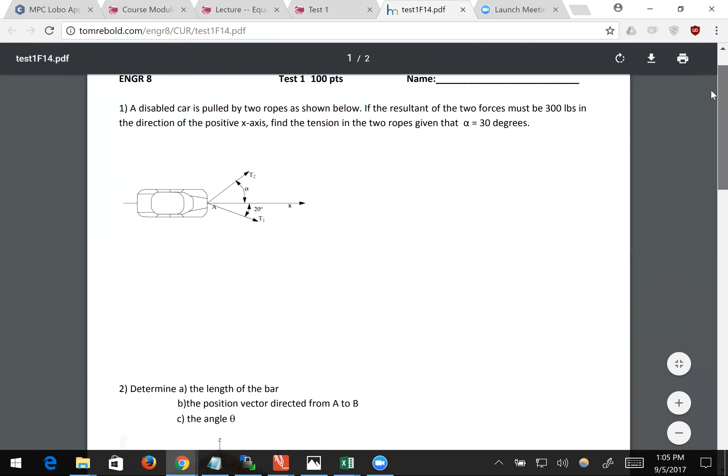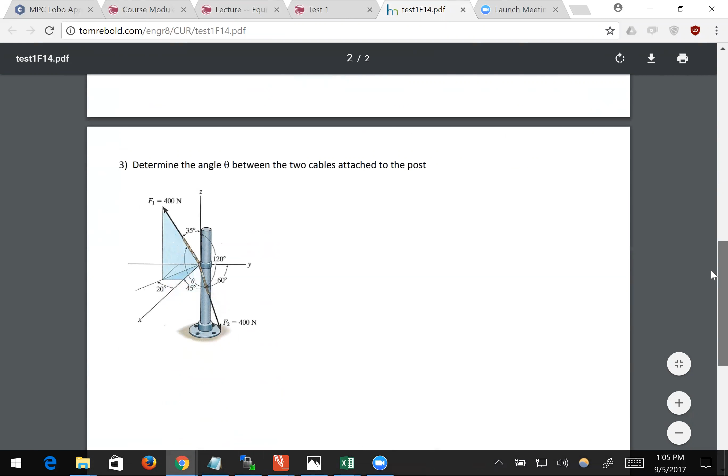Just in case you're curious, this is what the practice test looks like. It has a few problems like that. This is kind of assignment 2 stuff. This is position vectors. This is dot product, right? So yeah, that's what the test looks like. And that's the practice test.

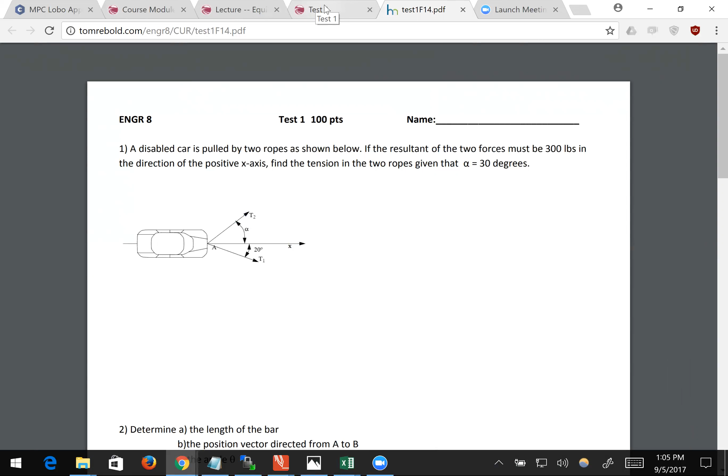Any questions before we get started on the homework? Can't go too far into it. Any short questions, because I want to make sure I get the lecture in today. Any short questions on the homework?

I'm going to have to close this. It's kind of too noisy. Can't hear anything.

And let me get this thing going. Oops, I can't do that. I want to do, this thing is really kind of annoying. What do I do with this giant menu bar? Put it down here maybe. There's just never any good place for something like that.

Maybe I can make it shrink. That's better.

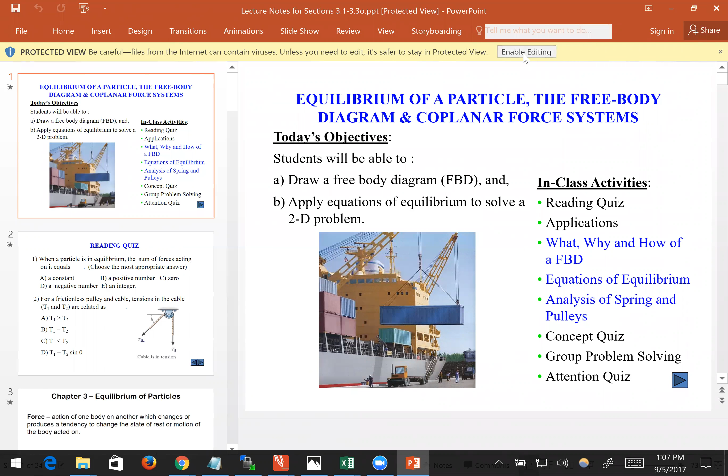So we're going to have basically 2 lectures this week. Problem session on assignment 3 on Thursday. You'll get the practice test to look at over the weekend. Monday's class will be your last chance for any questions before the test.

So you want to study really hard, all the practice tests, all the solutions, any questions you have on anything like that, you can bring up on Monday's class. Then you got the test on Tuesday. Yeah.

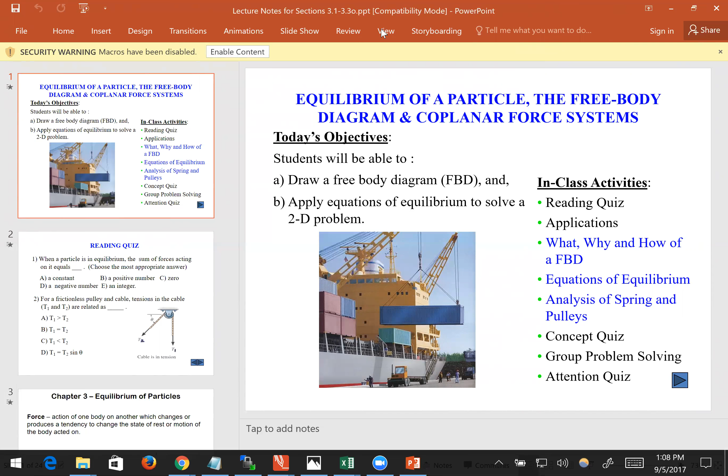Page of notes, formulas only. Yeah, but no, no practice problems, no solutions to problems. Just formulas and stuff. No.

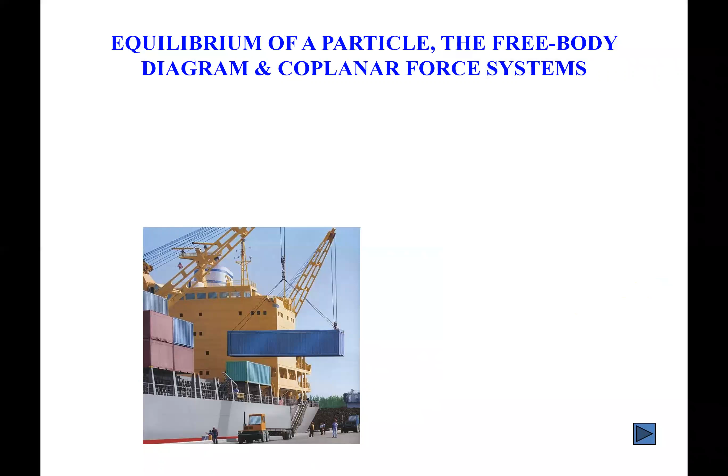Yeah, I don't like you to do example problems because I might be selecting problems from the textbook or example problems from the book. That means you're all on the same page. I don't want someone to say, 'Oh yeah, I figured out which one they were going to do.'

All the information's on the email I've been sending out. You got that email? Just look at that email, it's all in there. There's no access code, you just go to the link. You have to install an app, and then once you do that, you go to that URL and it'll take you right to the conference.

Yeah, video, you can share your desktop. I can share my desktop, I can show you how to solve stuff, you can have a conversation. Yeah, it's really helpful.

I think I might actually offer extra credit for people to just sign in once, just so you see that it's not that hard, so you know you can do that. I'll probably do something like that.

Well, every time I connect right now I'm using it. It's that simple, but just do it, it's not hard. Just follow those instructions, you can do it, it's real easy. There's really nothing to show you because you just go to that link and it will take you there.

It will install everything you need. Did you do it? No. You installed it, right? Yeah, install it, it's only on the app. So you went, but you didn't actually connect to the meeting. I clicked on the app with it, I was trying to put it on the meeting.

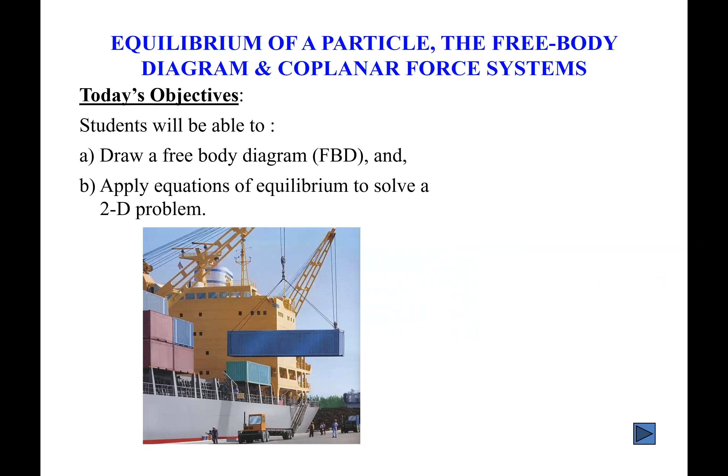All right, I'll make a video because people still seem confused, it's not that explanatory. I had a really nice system that worked really well, but it had a little flakiness to it, so I couldn't use that anymore. Anyway.

The other thing I'm going to warn you about is I'm going to start putting multiple choice questions on here, which are selected from the lecture. Each lecture has like 6 multiple choice questions on it. I'd like you to start paying attention to those and go back and look at those as a review, because these are kind of nice conceptual questions and some of them are short computational questions. I'm going to start putting those on the exams. And eventually, and maybe this semester, I'm going to probably have a multiple choice final exam, which is going to be a lot based on those questions and questions like that, because that standardizes everything.

And I can really tell, you know, when I'm grading partial credit, I really can't subjectively tell how the class is doing, how to objectively tell what the class is doing. So anyway, start looking at these things and taking them seriously.

So when a particle is in equilibrium, the sum of the forces acting on it equals what? Zero, if it's in equilibrium, right? Yeah, there's no net force on it, so it's in equilibrium.

For a frictionless pulley and cable, the tensions in the cable T1 and T2 are related as what? You want to close the door, somebody back there? They're kind of noisy. D, T1 equals T2 sine theta? Not a bad guess.

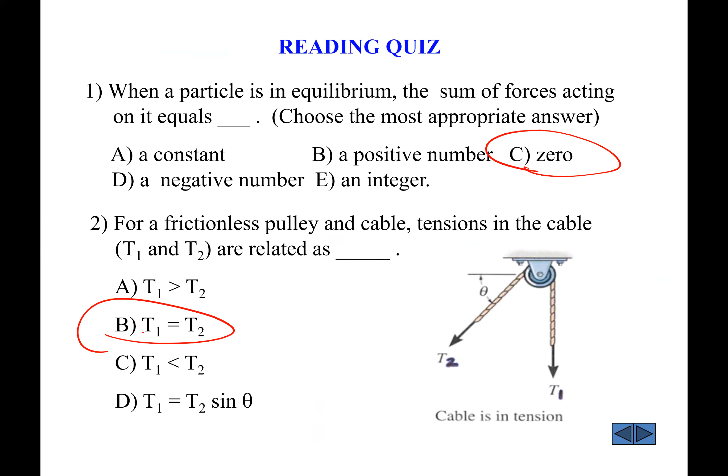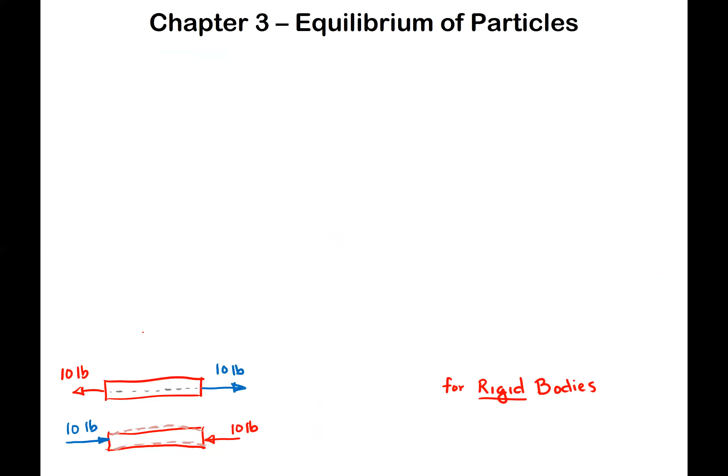Good, so yeah, we are going to study this notion of equilibrium, and we're going to get some pulley problems. Pulley problems are kind of cool. This notion of equilibrium relates to the idea that a force is like an action of something on something else, and it produces a tendency to change the state of rest or motion that the body is acting on.

And force is a vector quantity, and it's also a sliding vector, which is kind of interesting. What that means by a sliding vector is if you attach a force to a body and start yanking it here, or you attach it further down and apply that same yank, it's going to have the same effect on that body if you're acting along the line of action of the force. So you can move that force anywhere along the line of action, and it's going to have the same effect on the body.

That is called the principle of transmissibility, and we're going to use that a lot when we start calculating moments and things. So it is a vector quantity, it's a sliding vector in that you can actually move it and have the same effect. It has a magnitude, a direction, and a line of action.

So if the body is at rest, the forces have to balance out. In a very simple case, if you have this little piece of wood and you start tugging on it with 10 pounds and it's at rest, then something else has to be tugging on it 10 pounds in the opposite direction. If you're pushing on it with 10 pounds, something else pushing on it 10 pounds is going to keep it at rest, right? Those two examples are equilibrium.

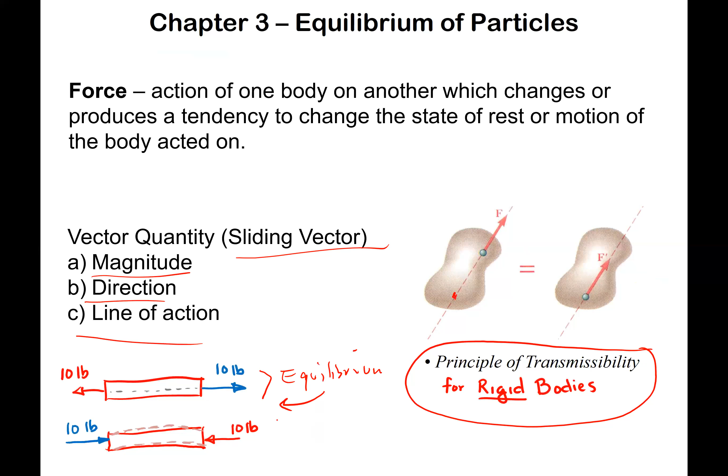There are some interesting forces involved in physics: body forces and surface forces. A body force is where you have some body, and an example of a body force is something like gravity or electromagnetism. Gravity acts at a distance on all the particles in a body and creates a force moving in a certain direction. So if you broke up that body into a lot of different pieces, they're experiencing this force at a distance.

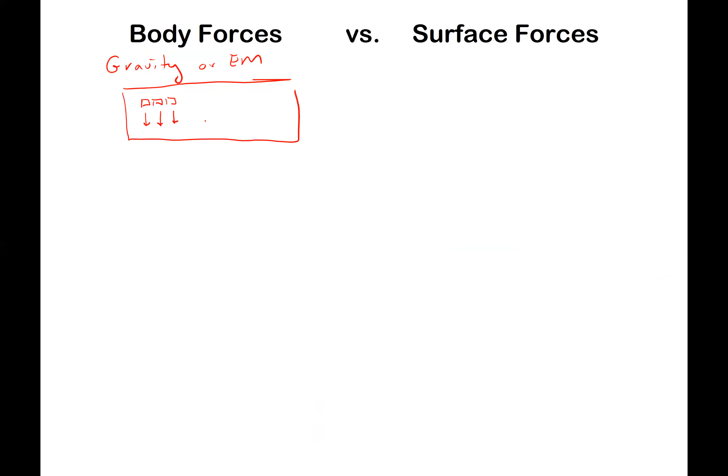And you can think of each one of these things as a weight. If you have I pieces in that body, you have a whole bunch of weights. And the gravitational net force is the sum of all those little weights. So you can model that as a big W. Here's the body, and you can replace that with a solid big W like that.

Now I did this a little bit backwards, my order is a bit off here, but the scenario is that you have a table with a book on top of it.

So that book, in order to be in equilibrium, is experiencing two forces. One of them is the force of gravity, pushing it down, and this is modeled by a net weight of that body. But what's the other force acting on it that's keeping it from falling down? It's a normal force, right? You got that from physics. The force of the table pushing back on it. And that's called a contact force.

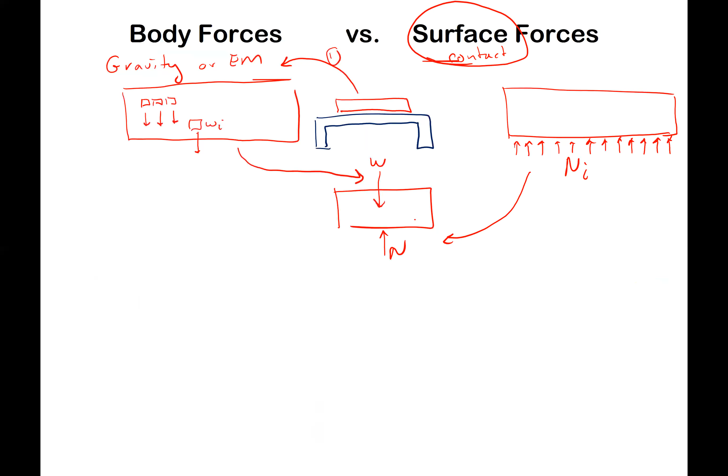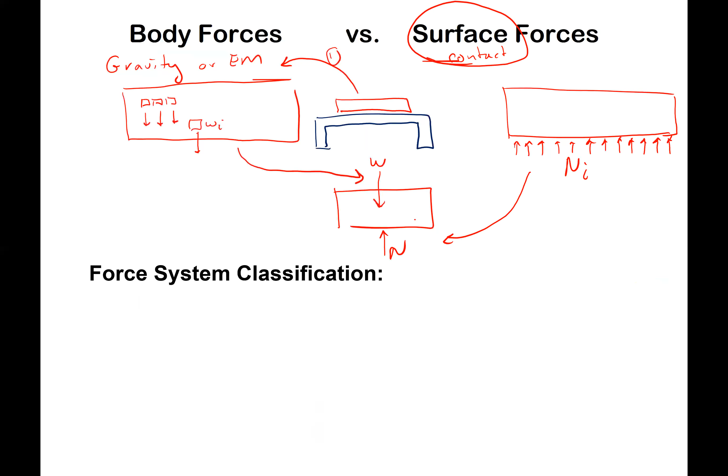And then we can classify various force systems as 2D, in which case all the forces are acting in a single plane, versus 3D. 3D forces are more general - we're going to look at those later. Basically in chapter 3, we're just looking at all coplanar forces.

Okay, questions? And the other thing with coplanar is that they can be collinear - in which case, with a collinear force system, the forces are acting along the same line of action, but maybe equal and opposite.

They can be concurrent. Concurrent is where all the forces are acting towards a certain common point. And they can also be parallel. With parallel forces, they are all going in the same direction. Or they can be neither, and that's the general case we're going to cover in chapter 5.

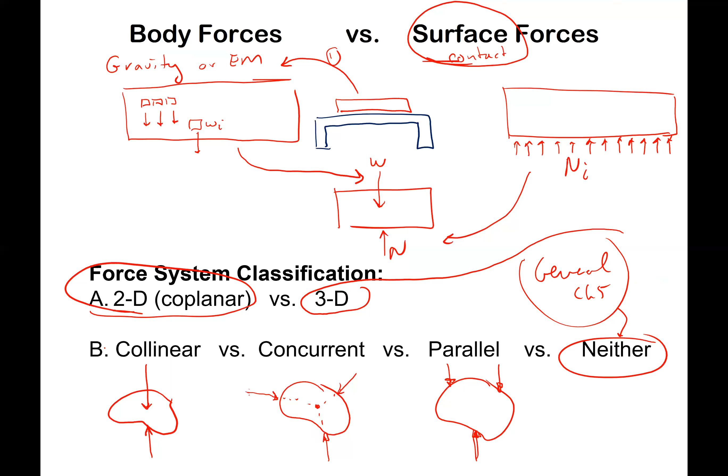You guys know Homer? He used to always say this is the most boring class in the world because all you're doing is the sum of f equals 0.

Here it is. Equilibrium: all points of the body are at rest or have the same constant velocity. When you're in equilibrium, the sum of all the external forces equals 0. These are vectors. The sum of all these vectors has to add up to 0 to be in equilibrium. That is an equilibrium equation.

You can use that to find unknown forces. We use it because we're given certain forces applied to a body, and there's always at least one unknown we have to determine based on the equilibrium equation. It's sort of like solving a crossword puzzle. Sometimes there's more than one unknown force, and you have to use different techniques to find those unknowns. That's what we're basically doing for the whole class.

So in 2 dimensions, this is a system of 2 equations and 2 unknowns. The equations are: the sum of all the fx components have to be 0, and the sum of all the fy components have to be 0. And if you go into 3 dimensions, you add the sum of all the fz components equals 0. So this is for 2 dimensions, and for 3 dimensions, you've got to do all 3.

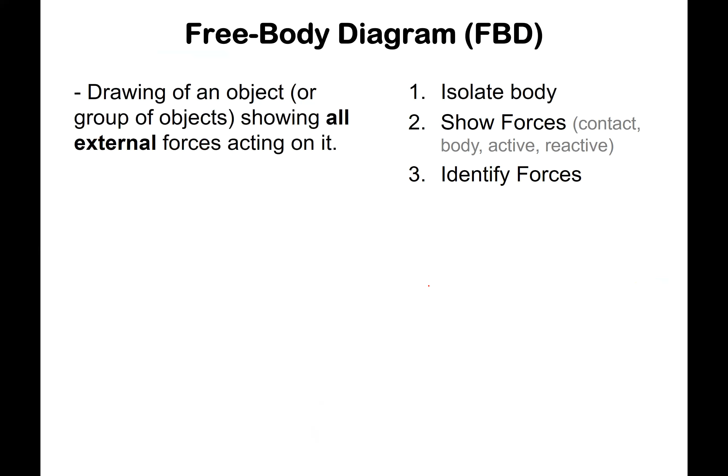The way you do the free body diagram is the first thing you do is you isolate the body from all the surrounding things that are attached to it. And you show all the forces, whether contact forces, active forces, or reactive forces, and you identify what those forces actually are. This is the conceptual part of the problem, and if you don't get this, you're going to be really mystified. The whole problem-solving process is just going to be a real challenge.

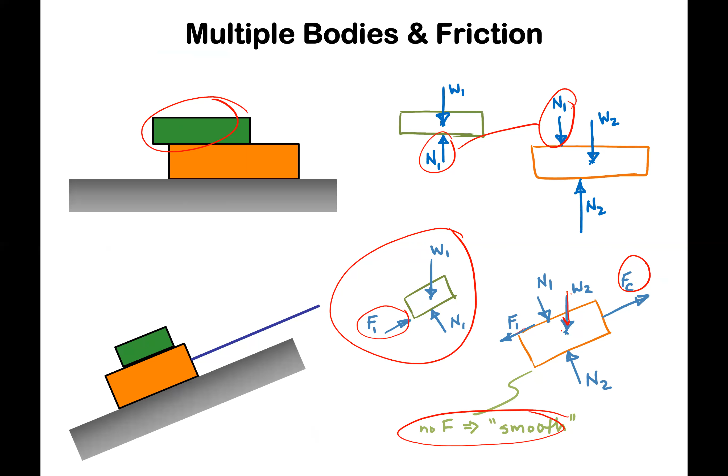You can see each one of those is an unknown, though, and eventually we'll have to figure out ways of solving all those things, given some information like the mass of the books or something, and the friction coefficient. But all those things can be determined given enough information.

So an example of the slope. It's an equilibrium that stays there, but it's not equilibrium if it fell. It's an equilibrium as long as it's not moving. If it starts moving, then, in general, a body that's at motion, constant velocity, is also in equilibrium.

It's only when there's an acceleration that there has to be an imbalance of forces. And we are always pretty much looking at bodies at rest.

We also have cables that we're going to get to look at. Cables have tension in them, and the tension is always oriented along the line of the cable. So whatever geometry you've got the cable in, that's going to determine the direction of the force inside the cable. The force is always acting along the line of that cable.

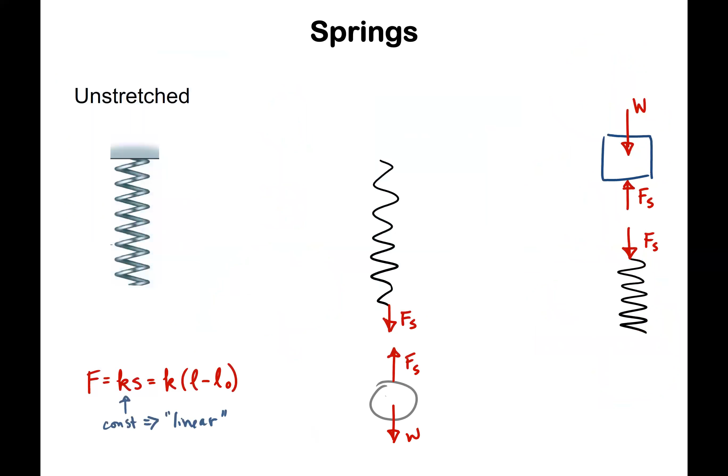And then there's springs, another thing you learned in physics. In springs, you've got an equilibrium length of a spring where it just wants to stay at that one particular length, and that equilibrium length is called L0 of the spring. If you stretch it, you're going to get some additional displacement S. The spring constant tells you that the force required to get a displacement S is going to be some constant times the displacement you're looking for. That's the spring constant. It's linear. And this S is just L, the new L, minus the original unstretched L.

So if you've got a mass on that spring pulling it down, then the mass is going to experience, in equilibrium, the force of the spring pulling it up and the weight of gravity pulling it down. The spring itself experiences the force Fs pulling it down as well. Springs can also be in compression, it works the same way. Again, if you've reached equilibrium with this block on top of the spring, then the spring force has to balance out the weight of the mass. Sometimes you're asked to figure out what's the displacement given the spring coefficient, that kind of thing.

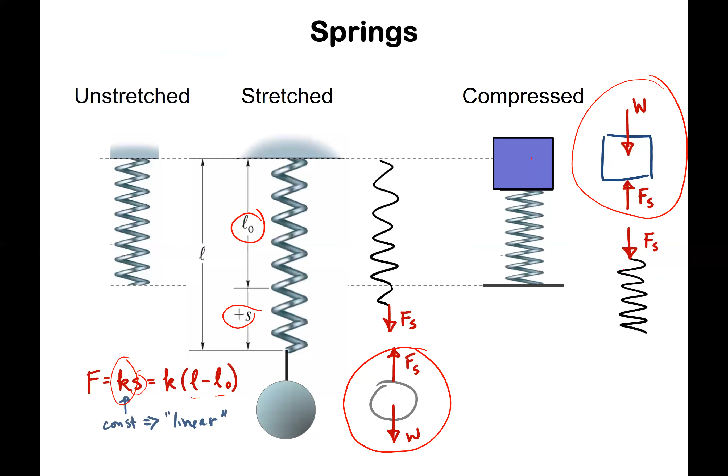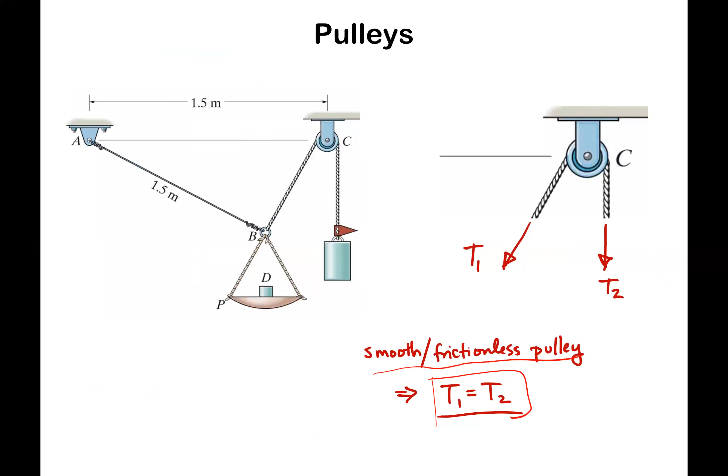Draw the free body diagram of the sphere, the cord, the knot, and the pulley. Again, this is an analytical process. You're breaking up a complicated system into smaller pieces so that you can actually determine what all the components are. You can then solve components throughout the system until you solve the whole thing.

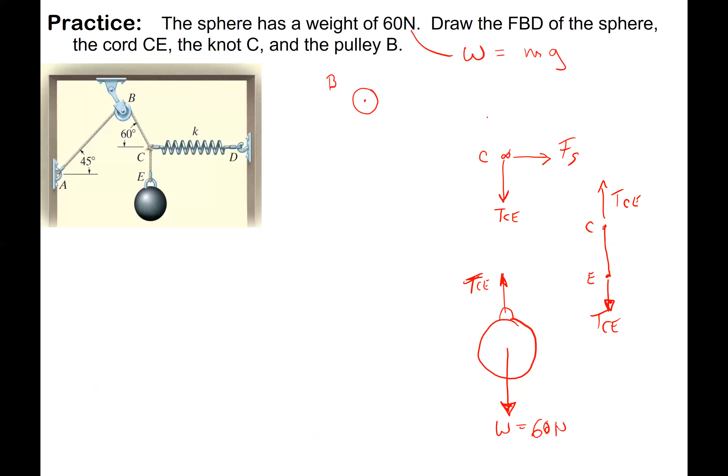And the angle of that is 60 degrees, right?

Why is the arrow pointing up? Why is the arrow pointing up? Whoops. Why is the TCB arrow pointing up?

Okay, good. Because from the point of view of the knot, this is the point, and actually this can kind of be confusing sometimes, right? Because the knot is pulling that pulley down, right? But from the point of view of the knot, what's it experiencing? It's experiencing this force trying to pull it, right?

So that's what we're doing. For each subcomponent, we're thinking, what is it feeling? What does it feel like to be that knot? It feels like you're being pulled in 3 directions, right? You're being pulled down, you're being pulled to the right, and you're being pulled up and to the left.

David? I thought free body diagrams divided that down to simplify an object into a single point. You thought with free body diagrams, you simplify an object to a single point. Right. And that is true for a lot of simple problems.

And in solving this particular problem, there is one point that kind of has all the stuff going on at it. What point is that? It has all the sort of important point forces. Sorry? The knot. Yeah, you would pick that knot and just do the free body diagram of that knot.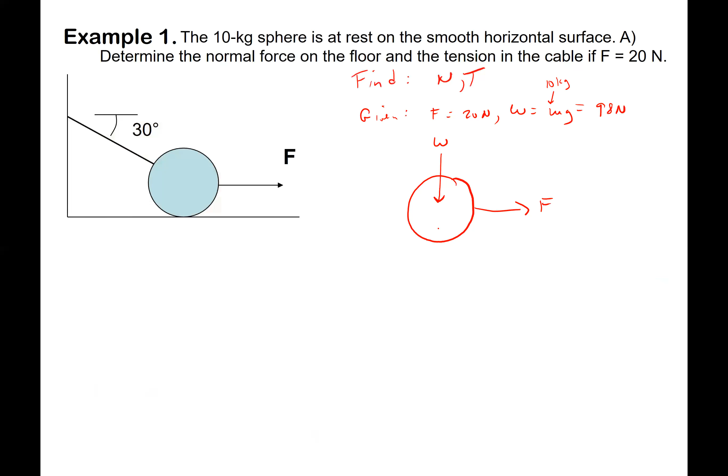Tension force pulling it up and to the left at 30 degrees. Ah, what did I do? There are too many danger zones when I'm using this stuff. Yeah, so it is up and to the left. So this is 30 degrees, and this is a force, say T - we're going to have to figure out what that T is. Oh, there's also a normal force, right?

Now, in order to solve this, we find that at rest, we're in equilibrium, and we're going to have to find that the sum of all those vector forces equals 0. Because it is a single point, single particle system, it's really just one vector equation - sum of all those forces equals 0. It is a 2D problem though, and that means you're going to get two scalar equations, and they're going to look something like this.

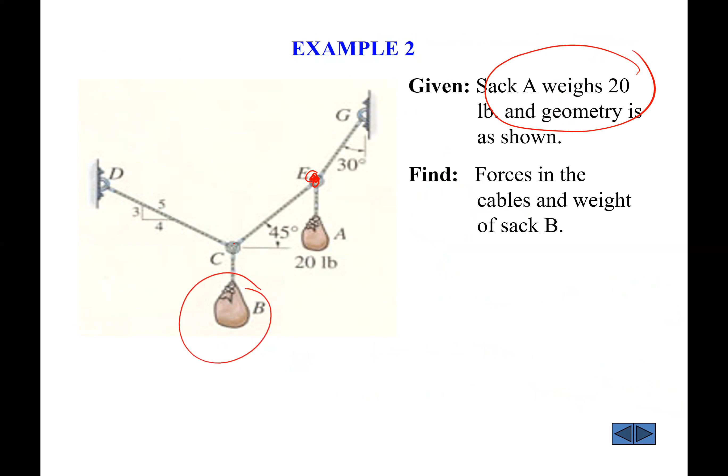Good, here's another example. We're going to skip this because of time. But again, in a similar way to the knot thing, you focus on a particular part and you solve that. You know what sack A weighs, so this knot at E is kind of where you could start. And then once you know what's going on there, you can figure out the weight of sack B, because this has to be in equilibrium with all that information.

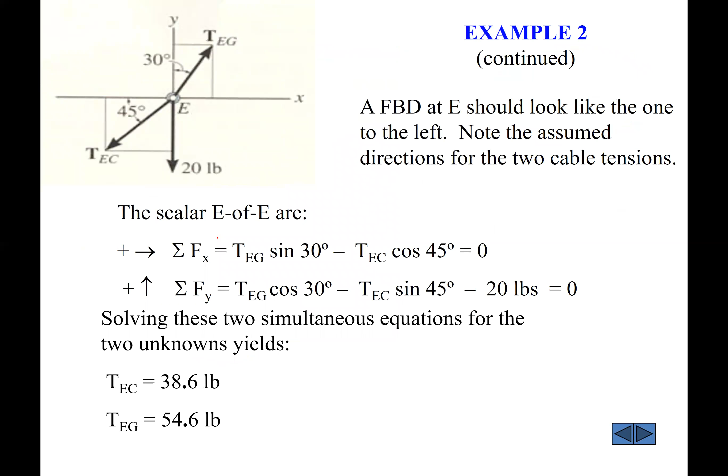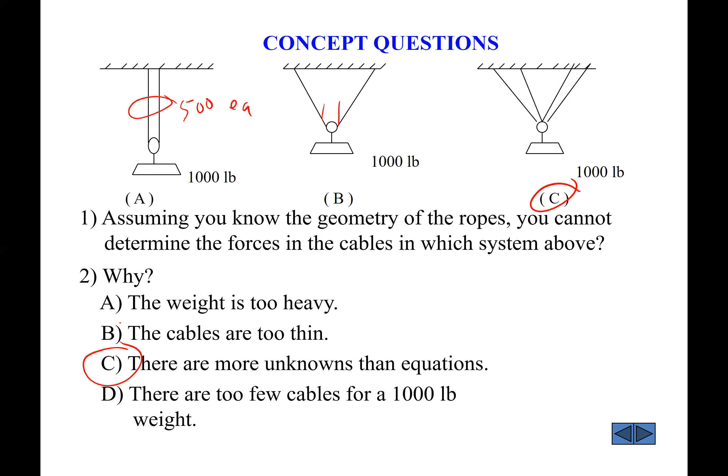But I think that's actually wrong. I think this is a wrong question, but anyway.

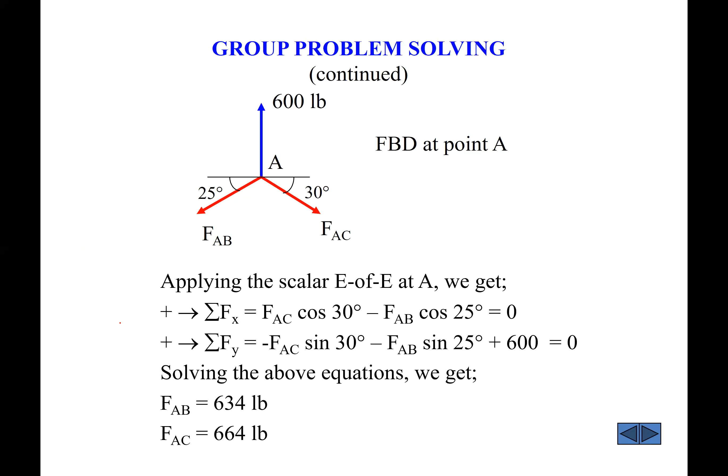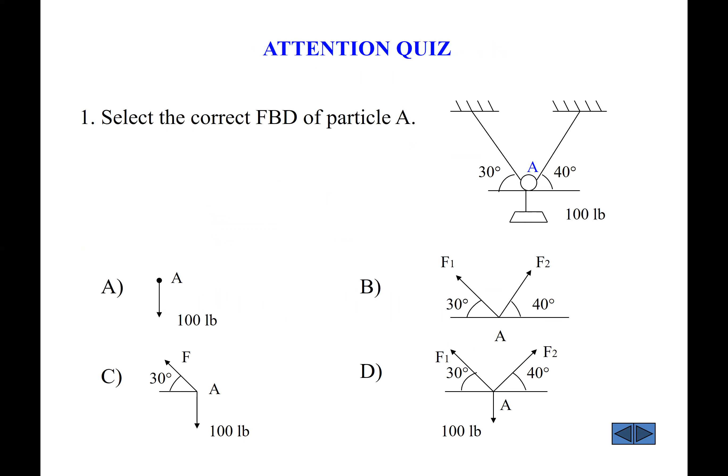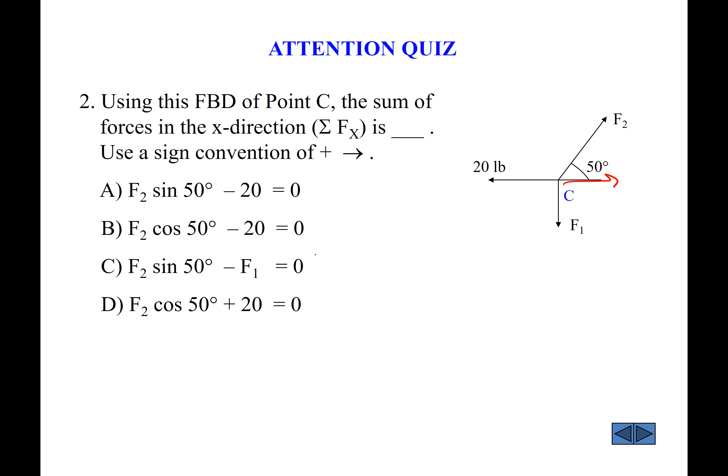B, right? F2 cosine of 50 is positive. That's the horizontal part of F2. You got 20 going in the negative. Equals 0. B. Good. Yeah, so these are going to be, I'm going to put some multiple choice questions like these on the test.

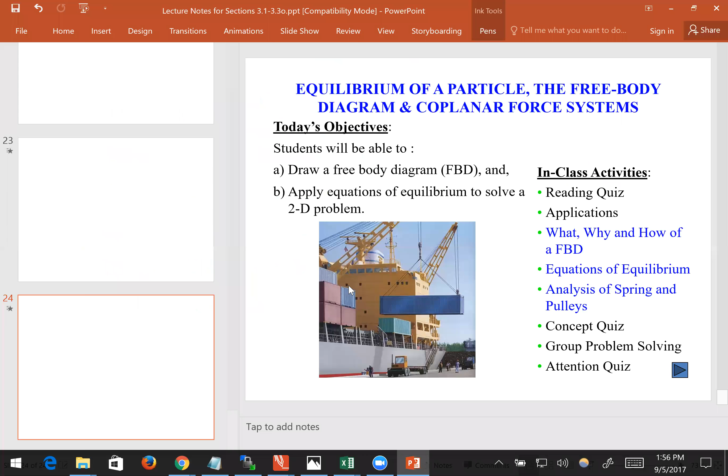That means we have to cover them in each lecture.

The last problem. Pardon me? I'll go through in the last, oh okay. Do you want to staple it to the rest of it? Yeah.